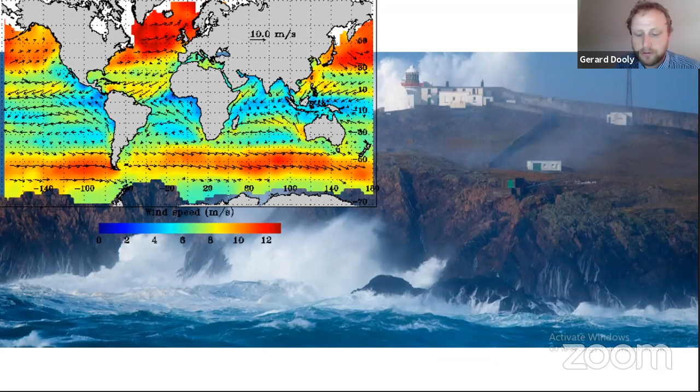So we get quite a significant amount of wave and wind action off our coast. This is being developed through government funding and also European funding to get resources from this in terms of energy production, and also to reduce the amount of CO2 we're producing in the country. If we look at the development and deployment of these MRE systems...

If we look at the UK, which is leading offshore wind, they are moving to, I think it's 30% production from offshore wind by 2030. Ireland is also looking at significant offshore wind capacities in the next 5 to 10 years.

The current ROV systems in use in the UK and other areas were developed traditionally for oil and gas, and are only recently making a transition to have more capacities for offshore wind and other shallow water operations. Your typical ROV system developed for oil and gas looks like this: you have ROV pilots, generally 2, operating the ROV via video feedback and joystick control. So there's mainly manual control of this work-class vehicle, which can be 2 to 3 tons and many thousands of meters away from the operator.

However, when we move this to shallow water ops, say below 100 meters, we have to make compensation for both wave action and increased current action.

So a traditional ROV that you're looking at here has a maximum operation window of maybe 2 meters of wave action and 1 meter per second of current, so 2 knots of current. This has significant limitations for the operations of the vehicle in commercial ventures.

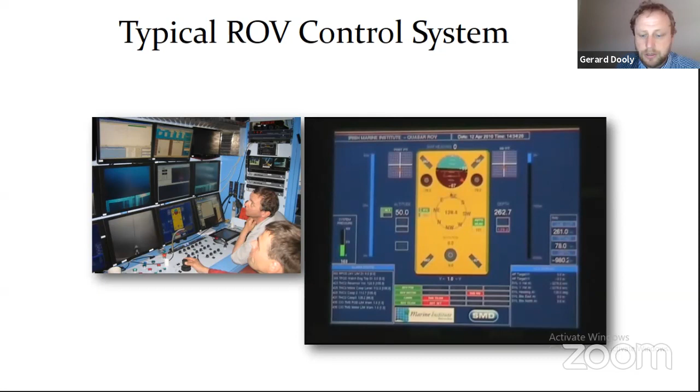If we look at the navigation and accuracy of these systems, these are images trying to get a work-class ROV to drive straight. In terms of being able to operate these systems in significant current and significant wave, they're not really suited to that environment, and a significant dependence is put on the pilot's skill to operate in shallow water.

If we look at this mechanism in the commercial world, there is significant demand to move these systems from fully manual mode to either semi-autonomous or fully autonomous systems.

What we looked at in University of Limerick, back in 2005, we developed our own ROV based on semi and full autonomy. We took a traditional system, an inspection class system that we built in UL, and we placed off-the-shelf commercial systems such as INS, DVL systems, and USBL systems, to allow us significant accuracy in navigation subsea.

So what this system does is take the last known GPS coordinate frame before it dives. It then calculates its trajectory based on dead reckoning from the inertial navigation system, aided by the DVL system and also aided by the USBL system. In this mode, we can get almost down to 2 to 3 centimeter accuracy in navigation.

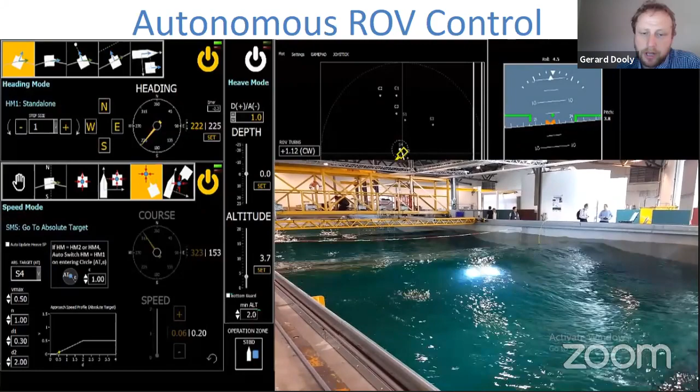So this is really what we developed over the first number of years at the University of Limerick. This is another example of ship following. You can see the ROV here.

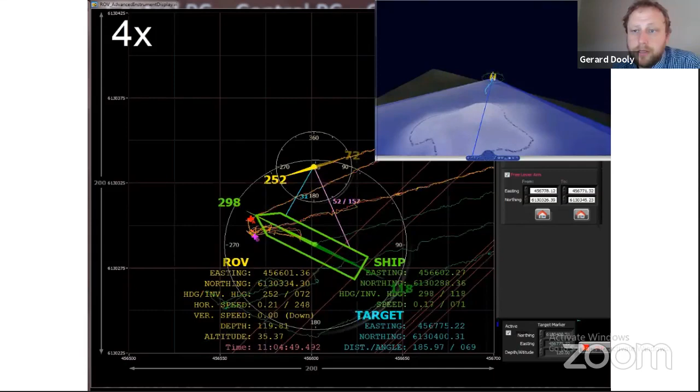We're doing long transects for multi-beam operations. We're imaging a shipwreck at 170 meters, and we're just doing our waypoint following reading. But it becomes difficult when the area you're trying to image is over, say, 200 meters long.

To be able to do that operation from a DP vessel, the best mode is to have the ship follow the ROV, or the ROV follow the ship. In this instance, we had the ROV follow the ship at a 50-meter distance from the bridge section.

This is the live multi-beam image coming through here. You can see this is the trajectory of the ROV. The ship is just over here, 50 meters distance, and the ROV was at about 120 meters. The vessel itself, this is the Empress of Britain.

It's the largest ship ever sunk by a U-boat. I think it's 220 meters long or something, a couple of feet shorter than the Titanic. But you can see, to do long transects and waypoint following on this is not a traditional mode of operation, and it's quite difficult for an ROV operation.

For this, we simply set the ROV to follow the ship, and then we ask the DP vessel operator to move the vessel at a specific speed. The mode of operation for the ROV was then more or less in fully autonomous mode.

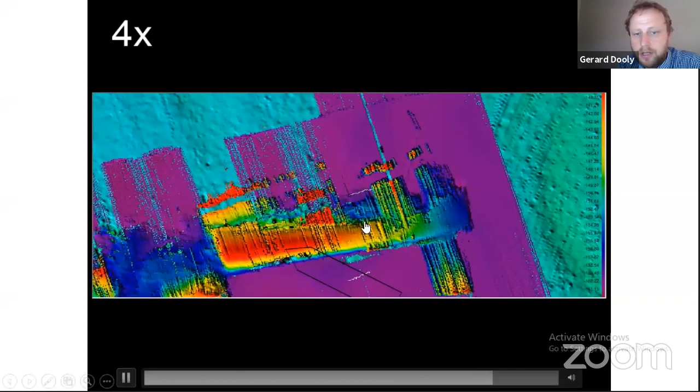This is the live multi-beam coming in. This is a Reson 7125 multi-beam, and this is post-processed. You can see the ship is torpedoed at the stern and has a broken hull here.

This is what we had in our university maybe about 7 years ago. We developed this control system known as OceanRINGS, doing smart mode absolute positioning from PHINS INS. What we looked at then was developing this further into perception systems, so the ROV could be more autonomous in understanding its environment and reacting to it.

We looked at this for both intervention and inspection, and what we were targeting really was the upcoming resident ROV field, which is what it turned into over the last number of years. There is a push within the industry to allow for permanent installations of ROVs, controlled from a shoreline control and command station. The target of this enterprise within the commercial world is really to expand the operation of weather windows.

If you think about the ROV commercial sector we talked about a few minutes back, an ROV pilot is pulling the ROV out of the water when it gets above 1.8 meters of swell, and when it gets close to the 2 knot current window. This limits quite a lot of the operation windows for both the UK and Ireland, as I think 80 to 90% of our weather windows are above those extents.

So the different modes we looked at for our ROV systems in UL were autonomous control in the ROV, which we'd done through OceanRINGS, in the manipulation systems, and also in the docking systems. There are other overlaps within imaging systems and coverage - if we're doing an inspection job, it's difficult to understand whether we've fully inspected the site. If we're developing a point cloud image through photogrammetry, it's difficult to understand if we've done full coverage of the site, so we develop systems to try and handle that and do quality analysis during the inspection period.

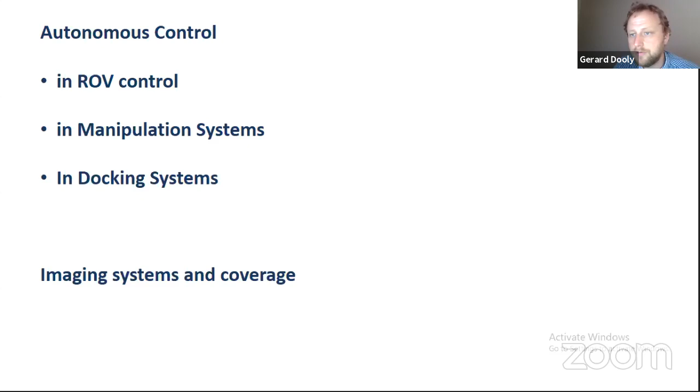So this is the autonomous manipulation system we developed. When we looked at the manipulator systems in the oil and gas and offshore wind sectors, we realized that about 80 to 90% of manipulators out there utilize Schilling manipulators, such as Schilling Titan 4 arms or Schilling Orion arms. So we looked at developing an autonomous control system which can be deployed on Schilling robotic arms.

Our reasoning behind this was that if we are to be representative of the commercial world, we need to have an autonomous software control system that can be utilized on the current fleet that are out there. It's difficult to justify developing an autonomous control system that can only be used on a small number, or a specific subset, of manipulator arms.

So this is the control system we developed. We developed an inverse kinematic control for this, and we also developed Cartesian space control for the system.

We also deployed a camera system onto the arms so that we could do fully autonomous control. The camera system gave us pose estimation to the target, and we utilized that in the control to be able to either turn a target, remove a target, or just insert a target.

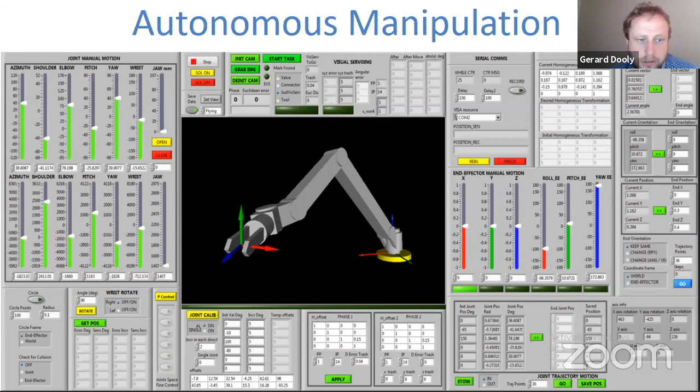So a quick example of this: this is the Cartesian space control on a 7-joint arm, an Orion arm, an Orion 7F I think. As you can see, we can move the arm in Cartesian space, moving in XYZ Cartesian. This is done through the control software that we developed.

The initial development of this was done for underwater welding and cutting, so we were looking at very high accuracy of end effector control and pose control for the end effector.

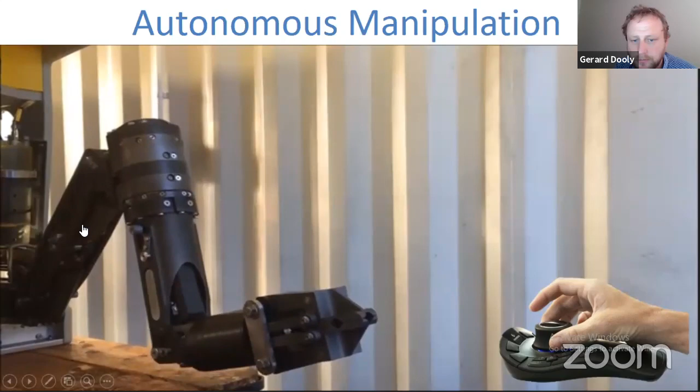Another system we looked at was live SLAM systems and reconstructions. These are some of the SLAM systems we developed. This one is based on feature identification and extraction, then stitching the frames together to get a photogrammetric model.

We developed this further into 3D based systems. We looked at sparse 3D reconstruction, and we also looked at dense 3D reconstruction, which I'll show you later on. But these are the sort of developments we had initially.

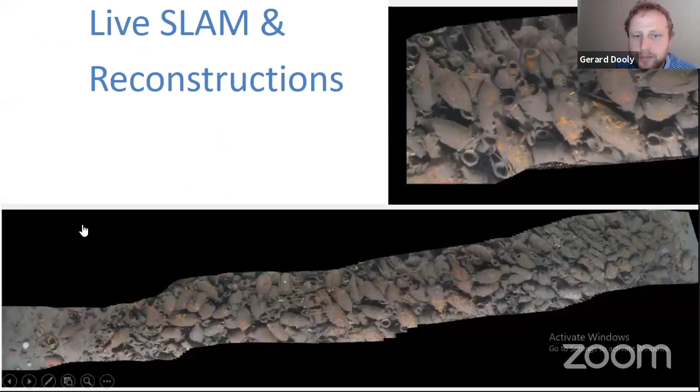As you can see, many of these developments cannot be deployed on the light class ROV system that we currently have. So we applied to the Science Foundation Ireland to look for funding for a large work class system, and we managed to get funding in the order of about 2 million for a full work class ROV.

This will be the second work class ROV system based in Ireland, the first being the Holland one at the Marine Institute. As part of the grant, we also offer this out through access charges, and we often do joint science missions with the Marine Institute with this ROV system.

So when we got awarded the grant, we had to go to tendering, and there were really 4 competitive systems that applied into the tender.

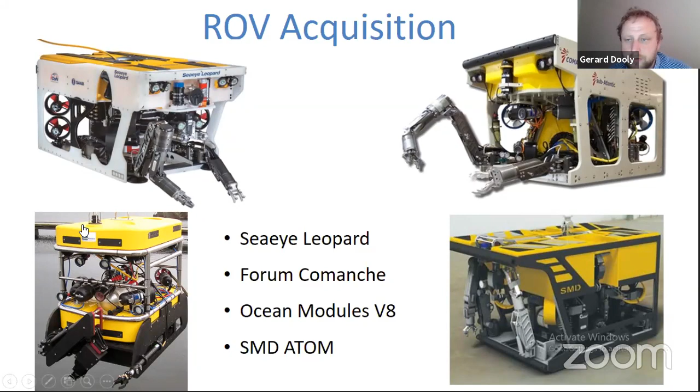This would be the SMD Atom, which is a hydraulic system. The Forum Comanche system, which is onboard hydraulics but mainly an electric system. A similar system, the Saab Seaeye Leopard. And we also had the Ocean Modules V8, which is quite a lot smaller than the other 3.

At the end of the tendering system, the selection was the Comanche. This is from Forum, and it's originally a sub-Atlantic ROV system. So this is the system that we ended up with at the end of the tendering stages.

We managed to get funding for a TMS system, the ROV, the control cabin, and a free-swimming winch. This gave us 2 different modes of operation. We had full depth operation to 2,000 meters through the TMS, and in this mode of operation you deploy the TMS, the tether managing system.

So it's effectively a garage. This is the main umbilical here, which goes to a surface launch and recovery system, a LARS. That launch and recovery system deploys this TMS down to 2,000 meters. Then the ROV has 400 meters of umbilical on this drum, giving us 400 meters excursion from the TMS.

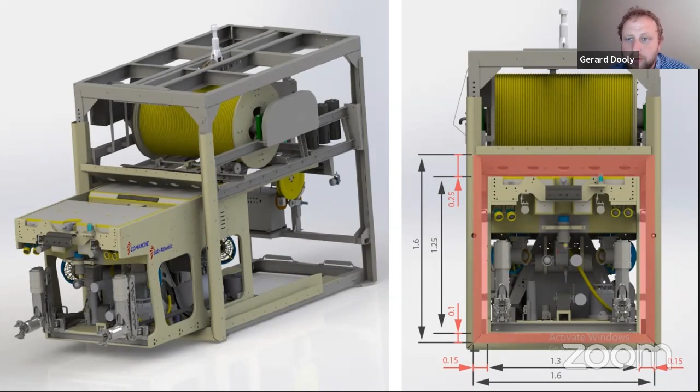So this gives us quite an envelope of operation down to 2,000 meters in Irish waters or abroad. We can do both research for the University of Limerick, science missions, and commercial operations as well from the system.

The second mode of operation was a free swimming mode. You can see this is the same ROV in free swimming mode. Here we have a small free swimming winch with 500 meters of umbilical, which is laid out from the deck of the vessel, and the ROV is deployed and recovered from the ship's winch.

What this allows us to do is operate from small vessels. So if we're targeting the offshore wind industry, a lot of the vessels currently maintaining these devices offshore in the UK are small offshore wind cats.

And we can deploy onto small vessels so that we don't have large ship expense when we're doing some of the commercial work, or also doing some of the research work within University of Limerick.

So this is the basic outlay of the ROV itself. The ROV itself weighs about 1.5 tons. The TMS is an additional 1.5 tons. And the launch and recovery system here, which is the blue frame, allows us to launch the ROV independent of the ship's crew. So this is about 16 tons. We can do either 2,200 meters of excursion from the LARS system, or 500 meters free swimming.

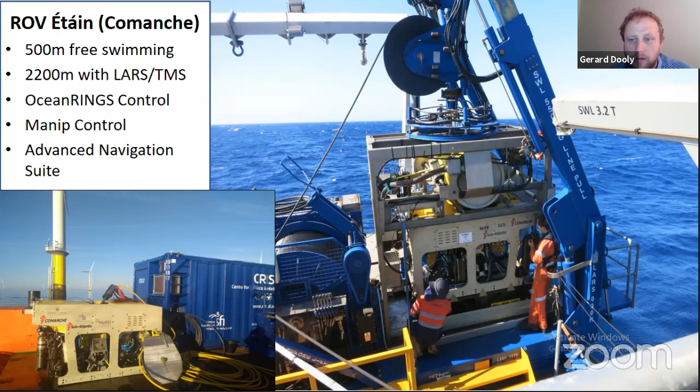For the launch of the system, we said we'd do a demonstration of our autonomous manipulation system. So this is basically when you're launching a ship, you often crack a bottle of champagne off the side of the vessel. But we said we'd get the ROV to open its own bottle of champagne and pour it over the ROV, done through some of the autonomous manipulation software we developed.

So you can see the cork being manipulated by the second Orion arm. It's really, during the launch, we just wanted to give a demonstration of some of the advanced control systems that we could do, and we managed to do this over the first couple of months of receiving the ROV. So it actually looked as if we were getting the ROV to drink the champagne, but it was supposed to be pouring the champagne over the ROV.

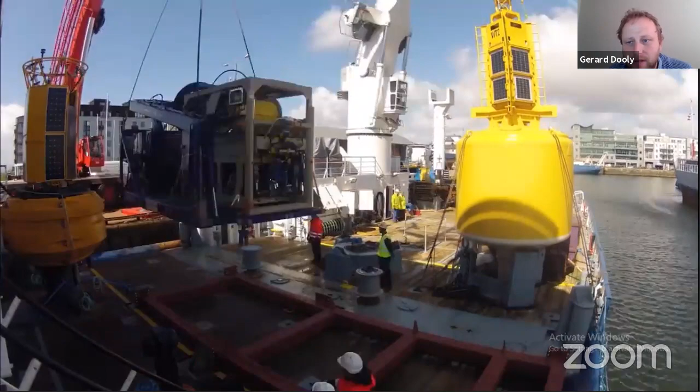And then this was our first operations. So this was on a DP vessel, one of the DP vessels that are in Irish waters. This belonged to Commissioners of Irish Lights. It's called the ILV Granuaile, and its purpose is to maintain all of the offshore lighthouses and buoys off our coastline. So we applied to get access to the vessel, and they gave us 3 days, just outside Galway. So we deployed all of our systems and managed to get out for a couple of days of operations on a SmartBay site, just outside the harbour in Galway, in about 40 meters of water.

We were meant to be going to deeper sites, to about 1,500 meters, but the vessel actually got called in for an emergency. So we got cut short from a 10-day operation down to a 3-day operation. But we managed to do a lot of the testing and development of our systems on board over those 3 days. So this was really the first year of operations for the ROV.

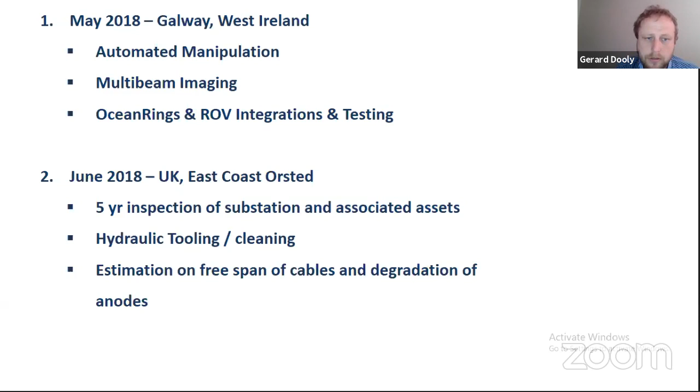Our third operation with the ROV was under an EU project, a transnational access under the Marinet2 project. For this, we did some multi-beam imaging over 5 days. We had to acquire quite a lot of multi-beam data, as the TNA access was to develop a smart system, using machine learning to identify the attributes of the sonar that can be automated, trying to automate the specifications of a traditional sonar using machine learning.

The fourth operation we did was off the south coast of Ireland, and this was a JRA operation, a Joint Research Activity under the EU Marine Robots program. This was also joined up with University of Ulster and University of Galway. They were looking at both biological and scientific surveys, and also laser imaging surveys of some of the sites off the south coast.

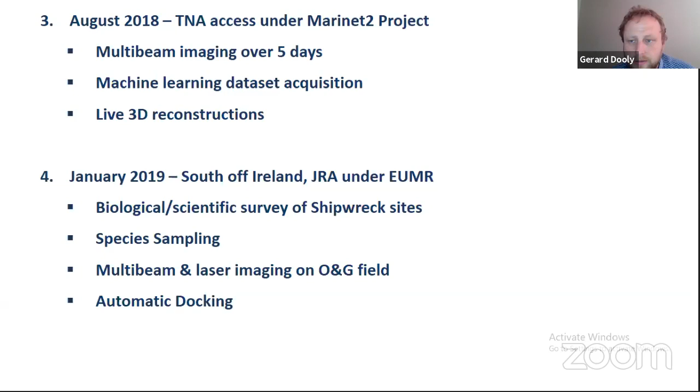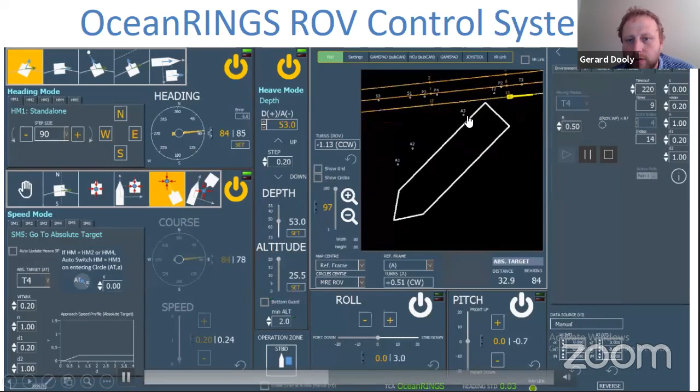Additionally, on this fourth cruise, we looked at testing some of our automatic docking systems for the ROV. This is the actual control system that we deployed onto the ROV Attain, which we call the MRE-ROV. This is doing a shipwreck survey using our waypoint following system, utilizing OceanRINGS on the MRE-ROV.

What we're imaging here is a liner in about 200 meters of water depth. The ROV was at 90 meters water depth, doing its multi-beam at about 55 meters. First we did a multi-beam over the shipwreck at about 20 meters water depth, and we realized there was a lot of netting coming off the shipwreck, so we set our close inspection multi-beam to about 53 or 55 meters, since the netting was coming up about 20 meters off the wreck itself.

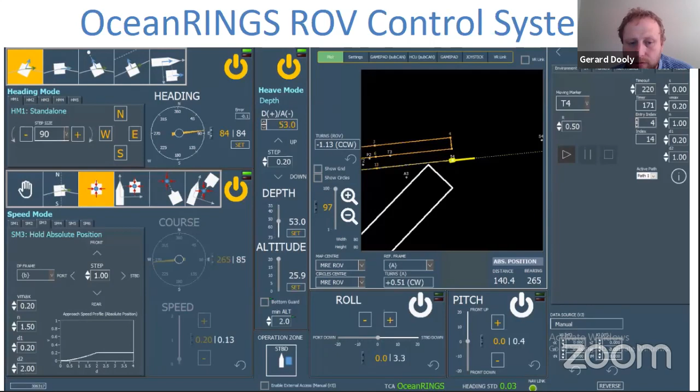This is a similar survey on the same shipwreck site. The site itself was a World War I shipwreck off the south coast, in about 90 meters. After doing the full multi-beam, which is a 3-pass system like this, we stepped off to the side. We were 20-meter distance from the shipwreck, angled down about 15 degrees towards the shipwreck, looking down at it.

We asked OceanRINGS to move along to the left-hand side, keeping pointed at the shipwreck. So I'll give you a quick look at that.

You can see the control that we can get from OceanRINGS and through the commercial ROV is quite good. We can keep the speed of the ROV to a minimum, which means the point cloud density that we get from the multi-beam system is quite large, so we get very detailed multi-beam point clouds as a result.

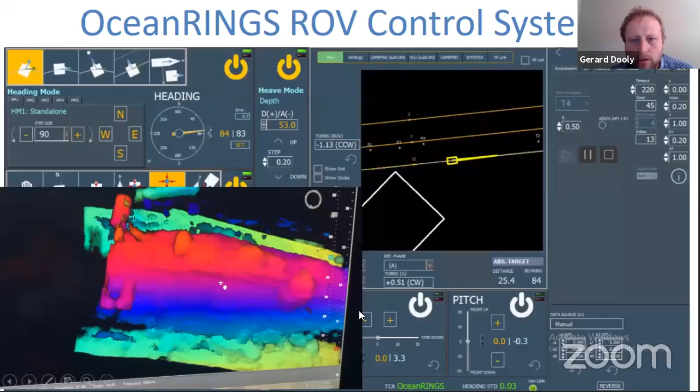This is another system, done at an altitude of 30 meters I think. Let me go back - this here was a pile of netting at the stern, coming up 20 meters off the vessel itself, which was a significant snag issue for the operations. We also had a lot of netting here at the stern of this vessel. This is a liner, and we did this at 30 meters altitude over the shipwreck as well.

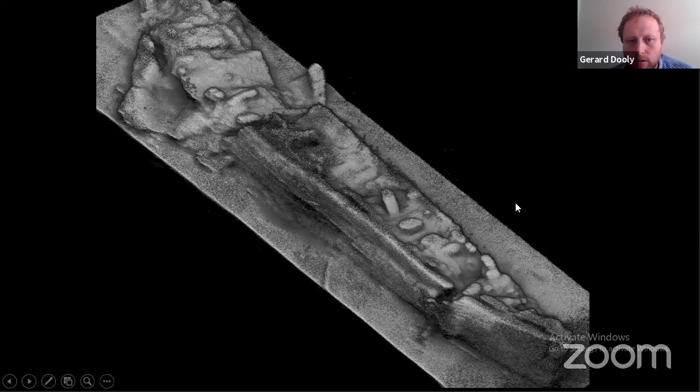Now this is some of the operations. This is the bow of the liner, and that's the breakage that you saw on the liner in the multi-beam itself.

And this is what some of the scientific lecturers that were on board with us...

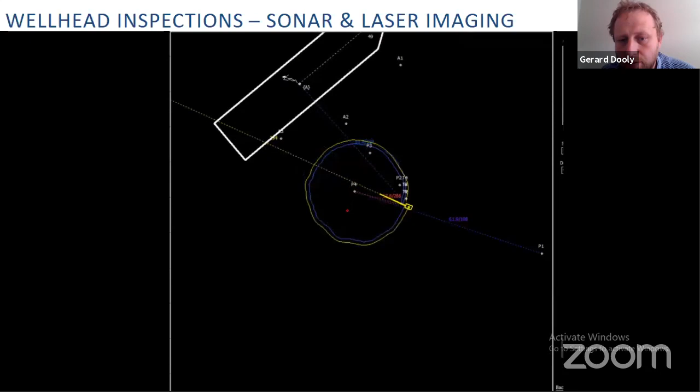And what we wanted to do was a 360-degree photogrammetric model of the wellhead, and also a laser line scan of the wellhead for comparison. So we did two inspections like this: a multi-beam scan, a photogrammetric scan, and a laser line scan as well. So we had a laser line system belonging to 2G Robotics, which gives us a very finite detailed picture of the imagery subsea.

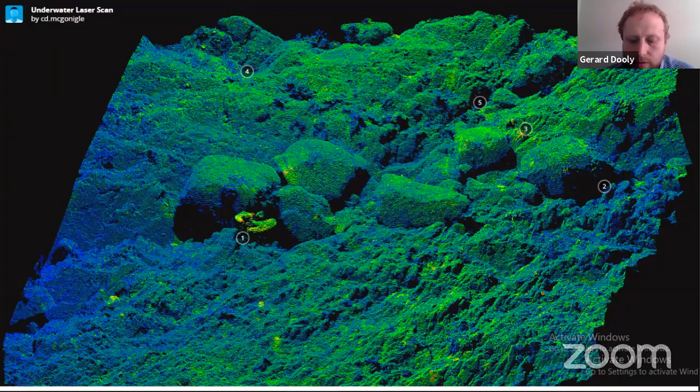And then what we also wanted to test during these offshore missions was the 3D dense cloud SLAM and reconstruction system. So what this does is we have a 30 frame per second camera, so it's a machine vision camera, and what we do is we analyze frame to frame on a pixel-based level.

And we generate a depth map for each of the frames. We do a recognition between the depth maps, between the frames, to recognize the movement in the camera. And then we can utilize this information to create a 3D reconstruction of the system.

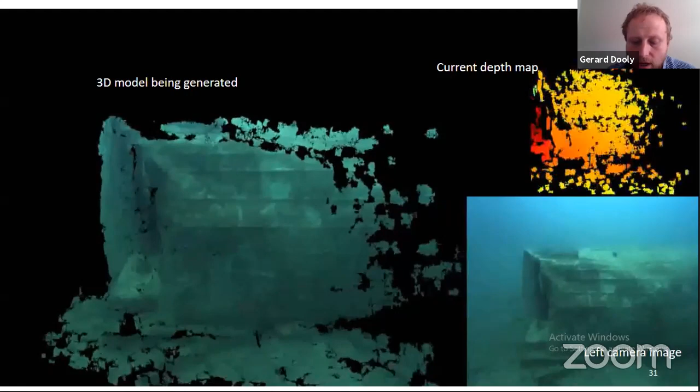So this is a dense 3D reconstruction, and this is just a demonstration of it. So as we move the camera around, what we're doing is we're generating that photogrammetric model. This is a live version of what you would see online, so it is lower resolution because we do slightly lower resolution to be able to do it in real time.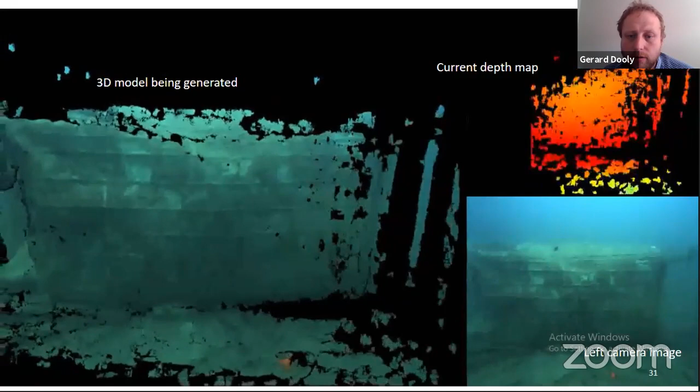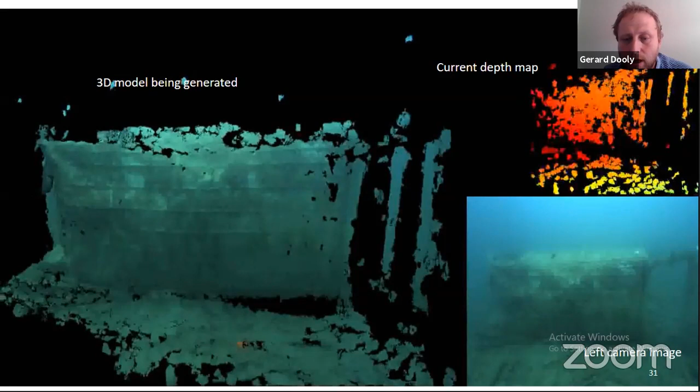But what this will allow us to do is, as we're moving around, we're generating the model, but we're also acquiring the high resolution data sets. So we can generate a high resolution 3D model of the system after. But the live system will allow us to understand if we fully covered 100% of the inspection site, and it gives us some quality analysis during the acquisition of the model itself.

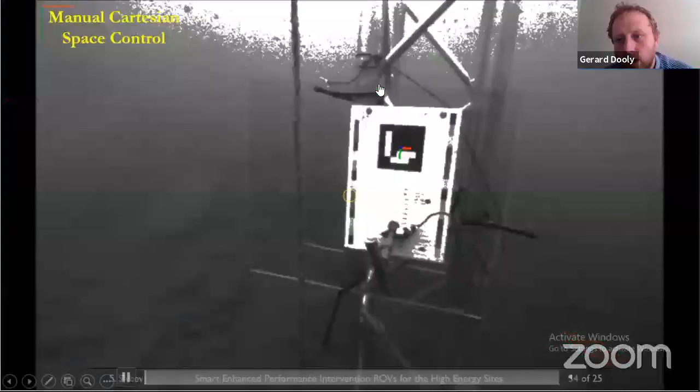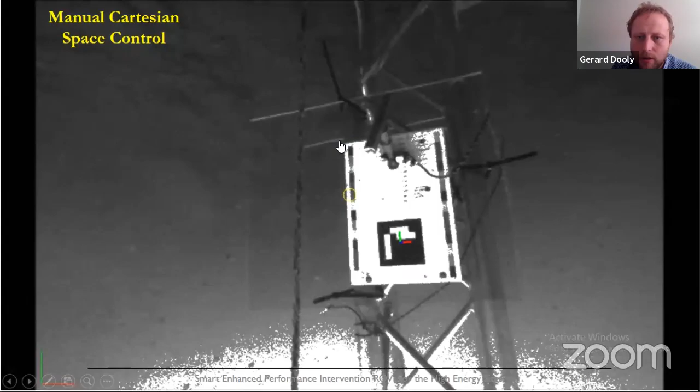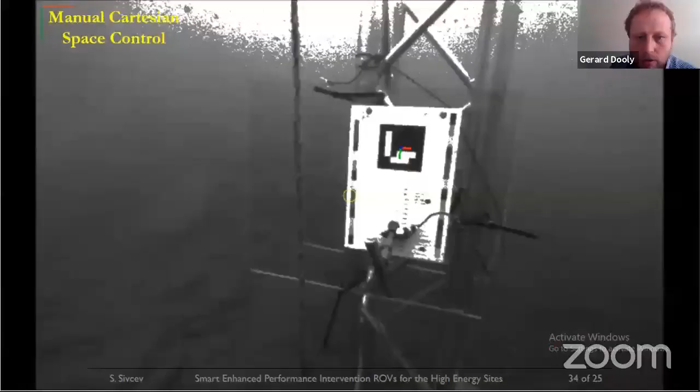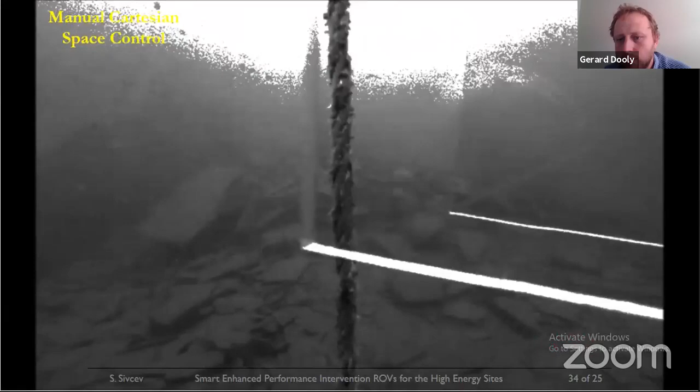The other system we wanted to test on the MRE-ROV after acquisition was the automatic manipulation system. So this is us using the system in Cartesian space control. There was a rope in front of the target, so we simply moved the rope to the back.

And then this is full autonomous mode. So it's using a fiducial marker to identify pose estimation to the target. And then we're simply telling the ROV a simple one-click command, such as turn target 23 degrees, or remove target, or insert target.

The last development that we did over these four missions was the automatic docking system. So we have looked at inspection systems, such as laser imaging, multi-beam systems, and also our live 3D reconstruction that we developed in UL.

We've looked at the autonomous manipulation system that we developed and then ported over to the work-class ROV. And then the last system that we developed was the autonomous docking system.

What we were looking at here was being able to dock the system in significant wave height so that you can eliminate the need for the manual pilot to be able to manually dock that ROV back into its garage.

There are many upcoming uses of this system, such as ASV ROV integrations. So if you want to be able to have an ASV deploy and recover an ROV, an automatic docking system will allow you to overcome communication lags and to eliminate the dependence on the manual pilot in the field.

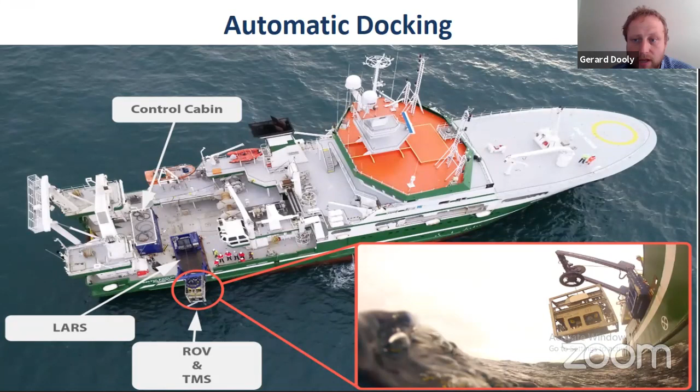This is the launch and recovery system, and this is the control cabin. So this is our full outlay for the MRE work-class ROV, and the ship that we're operating on is the Celtic Explorer, which is one of the research vessels belonging to the Marine Institute in Ireland.

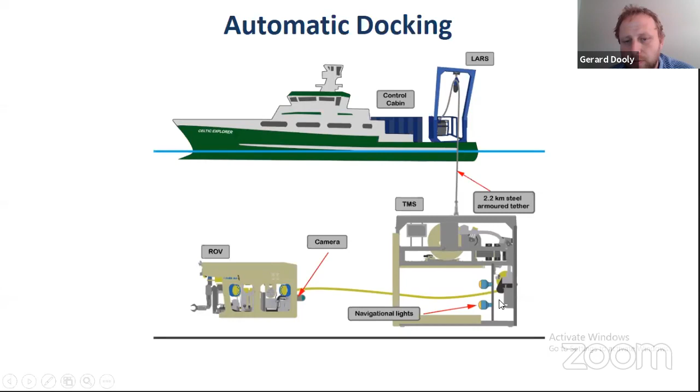So this was our overall outlay. The camera system was placed, it's a machine vision camera that we placed at the stern of the ROV. And then we had an outlay of navigational LEDs here, which are placed on the back of the TMS system.

So the LEDs are placed at a known distance to each other and in a different orientation. So given any orientation that we're looking at this camera, we can figure out which LED is up north and which is south.

So what we do is we do a processing workflow for this to identify the centers of each of the LEDs. So we capture the frame, we do distortion, we do some filtering on the system, we blur the system, and we binarize the image.

And then we are able to calculate the centers of each of the light markers.

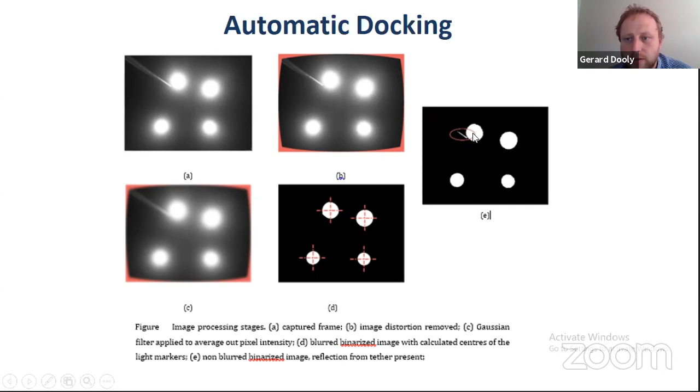Why we do this workflow is to try and eliminate image issues such as having a cable in the center of the screen or having some reflections off the system that can portray some errors in our estimation of the center of each of the LEDs.

Once we have known positions for each of the centers of the LEDs, we can calculate the relative pose estimation from the ROV to the center of that TMS garage system.

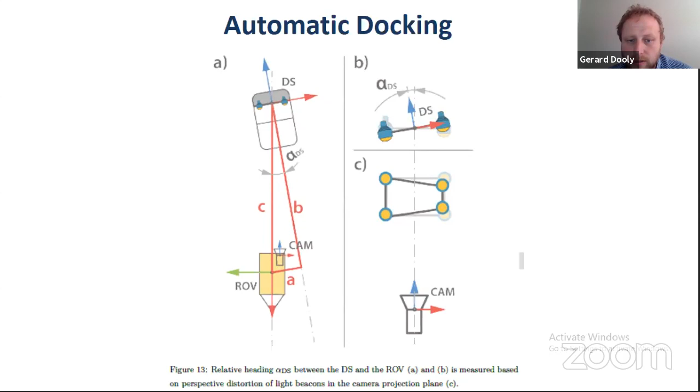So it's this pose information then that we utilize to be able to dock the ROV back into the TMS automatically.

In a dynamic mode, we do have a number of interferences from environmental actions and from the actions of the vessel, the support ship.

So if we think about this, we have the ROV itself, which is moved by environmental conditions such as waves and sea currents. We have the vessel itself, which holds the TMS via a taut line. So the ship's movements have direct influence on the TMS movements.

So if the ship is moving in the waves, you will see TMS heave. You will also see TMS yaw as you move about. And also the ship's roll will have influences on the TMS itself.

We then have a pulling force between the umbilical that carries power and comms from the ROV to the TMS. And we have swing as well from the TMS due to the movements of the vessel itself.

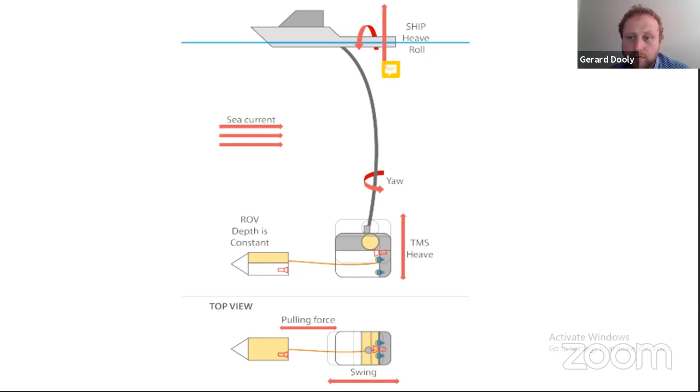So all of these influences combine together to make it difficult for the ROV to automatically dock back into that docking station.

So if we look at this first, this is a quick video image and a quick outlay of what we achieved during this mission.

So during the initial instances, we deployed the TMS and it was based onto the seabed. So we kept a loose line between the ship's vessel and the TMS garage.

This made it quite easy for the ROV to be able to dock. We could do it slowly, as we had minimal influences on the TMS itself.

We still had the influences on the ROV, which were current and sea state conditions. But they are quite easy to overcome compared to the disturbances that you will see on the TMS itself.

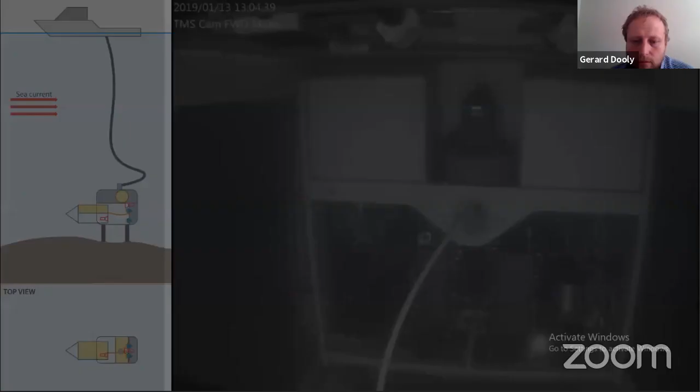So the second system, our second set of testing that we did was a dynamic system where you have the ROV, which is tethered in the mid-water column. So the TMS is above the seabed and between the ship itself.

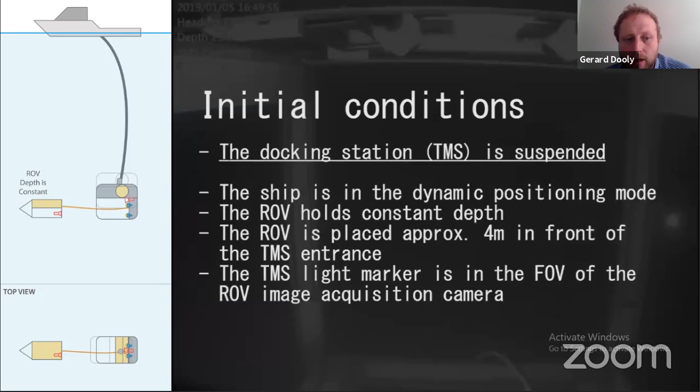And this is your typical mode of operation that you will see within the commercial sector or upcoming commercial sector. So this vessel here could be either a small offshore vessel or it could be an ASV. So we have all of these disturbances that we have to overcome for the dynamic system.

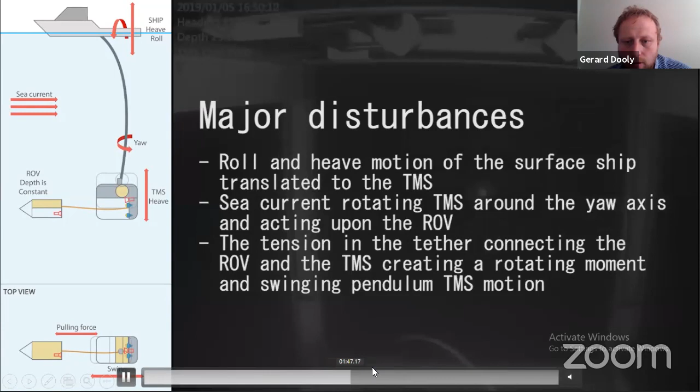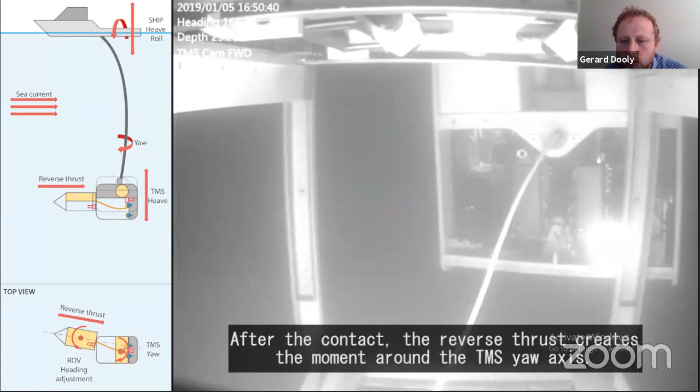So you can see this was done in about 1 meter wave height, so that was about 1.8 meters in total disturbance. You can see it is quite difficult for the ROV to dock.

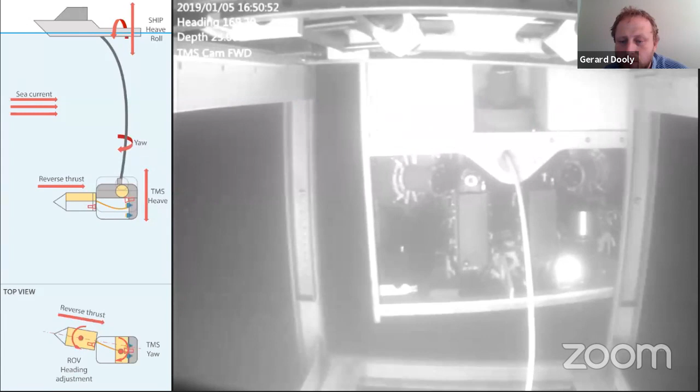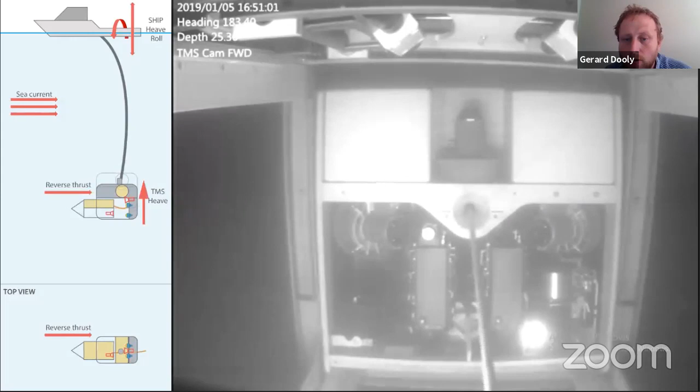What we did for this instance is we took the approach that an ROV pilot will take. An ROV pilot will line the ROV up in front of the TMS, and at one stage he will commit to docking that system. He'll commit down back into the docking system and make contact with the docking station itself. Once he's made contact, he will keep contact with the docking station and make slow movements to get into the dock itself. So you have to be much more dynamic in this instance and much more committed to the dock to be able to get the system in.

So you can see, try and make contact with the docking station, and then you make some small adjustments to get the system into the dock.

So these are some of the pose errors, the pose estimations that we achieved during some of the docking. This would have been the dynamic docking, the third one that you would have seen. This is the depth error, or the depth estimation on the pose. You can see there is some error here - this should have been here somewhere. So we do have errors, and we are going to implement some outlier detection and elimination there.

This is the Z, X, and angle estimations of the pose system. As you can see, there are some errors and outliers that we can eliminate. But you can see as you move - this is distance in ZD - as you move closer to the dock itself, so this is number 4 here, you've achieved dock at this point. As you move, this is your pose estimation as you're getting close. This is XD and this is angle.

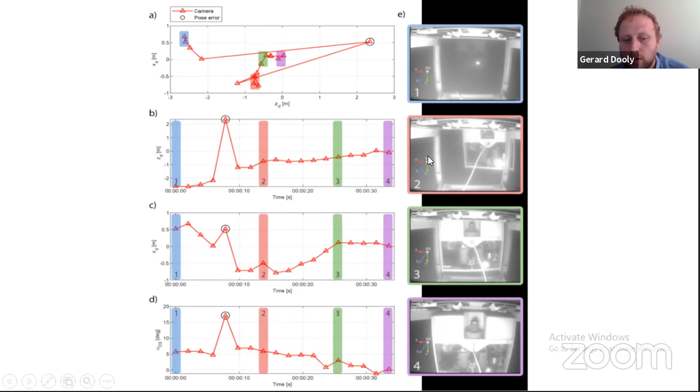Another thing that we looked at, we thought about the resident field itself. For resident ROV systems, a typical ROV in absolute control or in dead reckoning navigation estimation will have an INS system on board, aided by a depth sensor, sound velocity probe sometimes, and also a Doppler velocity log. Now, what they will do for multi-beam - if you want to acquire multi-beam and have very accurate estimations, or if you want to do close quarter inspections or interventions autonomously, you have to have very precise navigation and control.

Your typical ROV with INS on board and DVL on board will still have significant errors, so you have a drift which incrementally increases over time. To eliminate this drift, you put in either an LBL system or a USBL system. Now this makes the overall solution quite expensive - your INS and DVL will be upwards of 150,000, while your USBL system will be an additional 150,000. So your navigation solution is coming in quite expensive.

Also, with your LBL or USBL system, there is a significant amount of maintenance for that system. INS system with DVL will work quite a long time, but a USBL and LBL will require ongoing maintenance as they're deployed. So if you have a resident field with all of these systems in place, it can be quite expensive. A lower cost solution might be a Geotag.

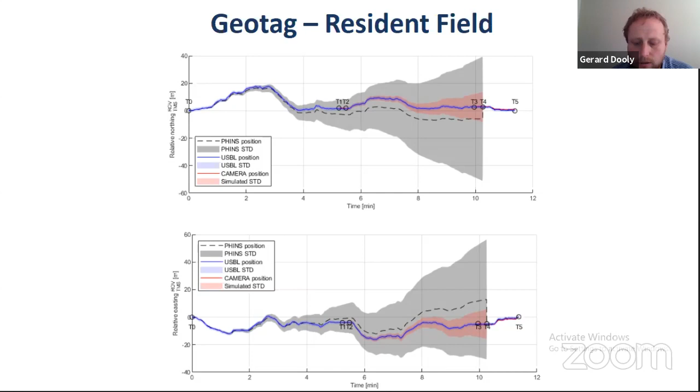So this is just a small concept that we were also working with once we were doing some of the autonomous navigation systems and the autonomous docking. So that is effectively the presentation. I hope you got some insight into some of the developments that we have ongoing within the University of Limerick and some of the ROV inspection and intervention capabilities that we've ongoing and that we've done in the past.

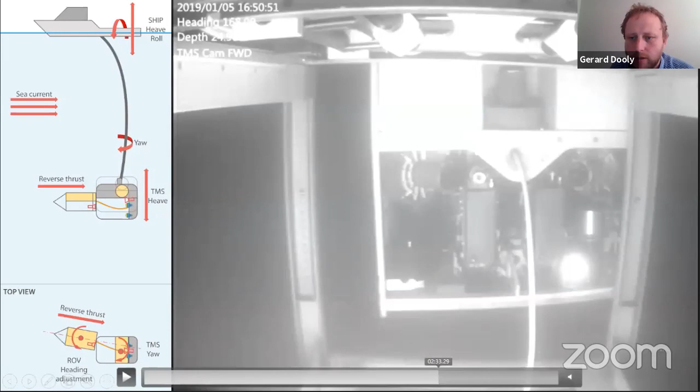Yeah, so for this system there is a significant risk, like you can see in some of these docks. Some of the previous ones, maybe we docked them about 10 times, and we did maybe a day and a half of testing for this system.

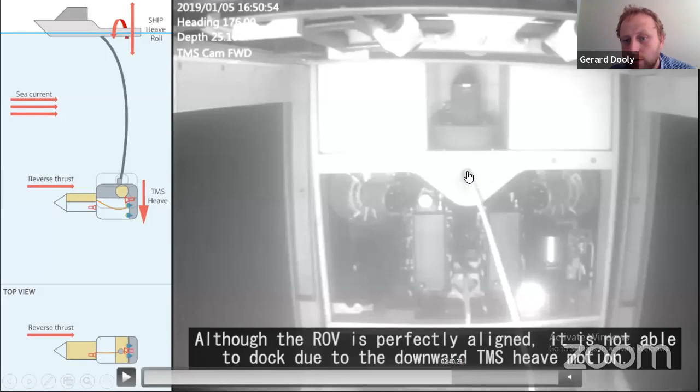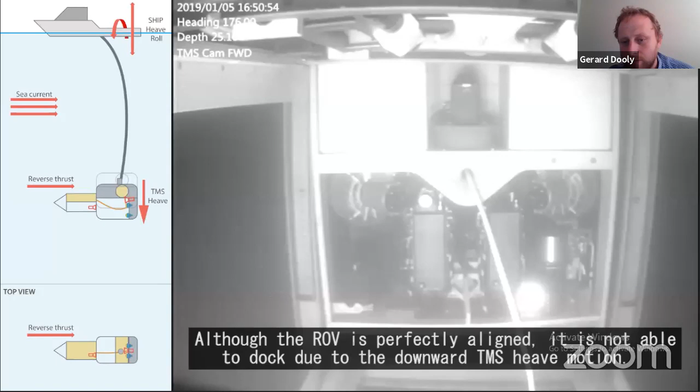At the start, I think there's a longer part for this one, but the tether here is your comms to the system, so all of your power and communications go through it. Now, if that bangs off the frame quite significantly, you're going to have a breakage in your fibers, so you're going to have full loss of control to the ROV, basically. That's quite dangerous for the ROV, because if you lose control and you're in maybe 1 to 2 meters of swell height, it's going to be very difficult to get the ROV back into the dock. Now, you'll still have control over the winch, which is on the TMS, but your comms to the ROV will be gone, you know.

So that is the risk, but I guess that is why we started with the system on the seabed, so that we could see how much risk we're taking on. Through the development and testing of that, it was quite good in not getting into a position where the middle of the ROV was often hitting the frame. But we also did have a manual pilot ready to take over as well.

Can I ask another one? Regarding the communications, since you are using more autonomous behaviors, have you tried having latency or lower bandwidth, and how will it degrade the control? So we were looking at putting it through some SATCOM systems. We have controlled it over the ship's SATCOM, which has maybe a 1.5 to 2 megabit connection over satellite. We've controlled it over that, but it's only waypoint following and simple depth hold and different things. We haven't put it into dangerous operations like this per se, so we haven't fully tested it to that extent. We were talking about going down further into that and testing more of the lag to see how the system operates within that.